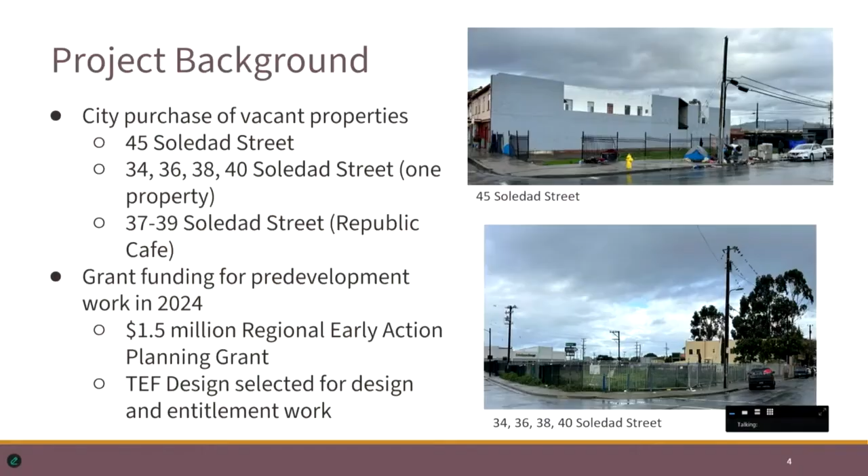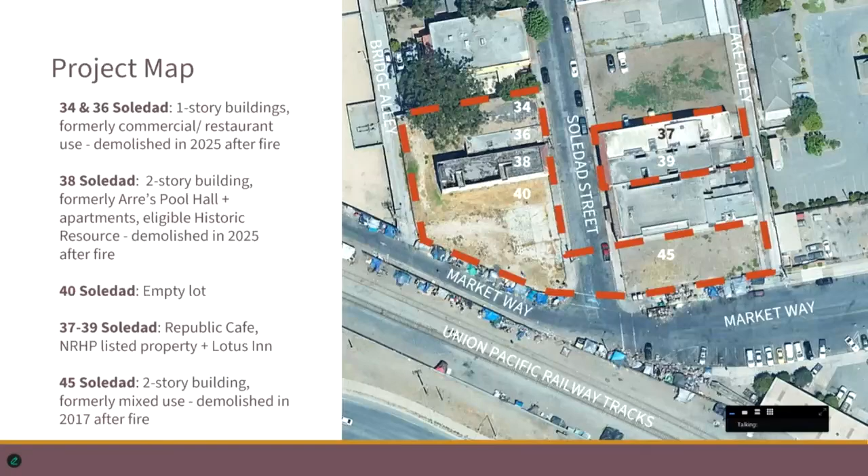So why did the city choose to undertake the pre-development work? It was a number of reasons. First and foremost, we've had trouble attracting private investment in Chinatown.

So by taking the first steps, acquiring the land, preparing any environmental studies, any remediation, preparing a set of plans and having those approved through the planning department, we're taking a lot of the risk off the private sector or the nonprofit developers and creating a site that is ready for financing and building permits. So a lot of the upfront work has been done.

The other thing is the community is very interested in the Chinatown Revitalization Plan and the redevelopment of these sites. So we wanted to make sure that they not only had a voice, but really a full seat at the table in this design work, so that we could honor the history of Chinatown, the rich architectural history there.

And then finally was to oversee the development of a really successful 100% mixed-use affordable housing site with various incomes from low to median to moderate income, mix of unit types, so you have a dynamic neighborhood, both studios, 2 bedrooms, 3 bedrooms for families, units specific for seniors, and then to have commercial space that's really viable.

Oftentimes with mixed-use development, the focus shifts to housing and the commercial side is maybe an afterthought or not fully fleshed out. We wanted to ensure that these sites were built so they'd be primed for success and future tenancy.

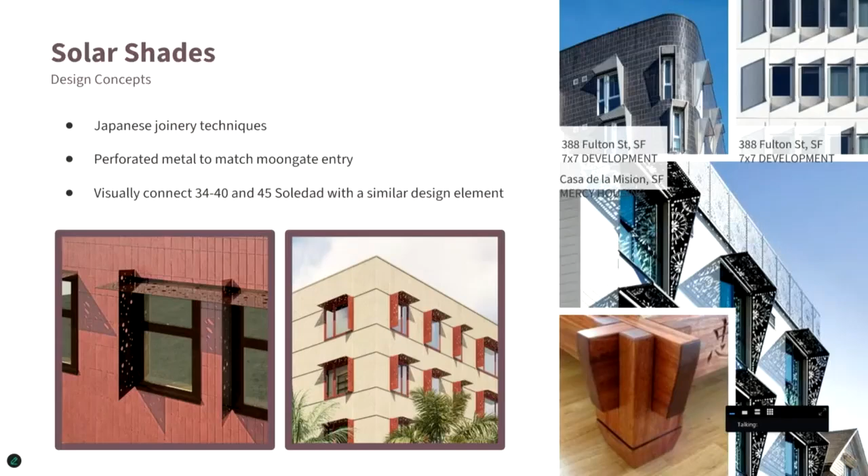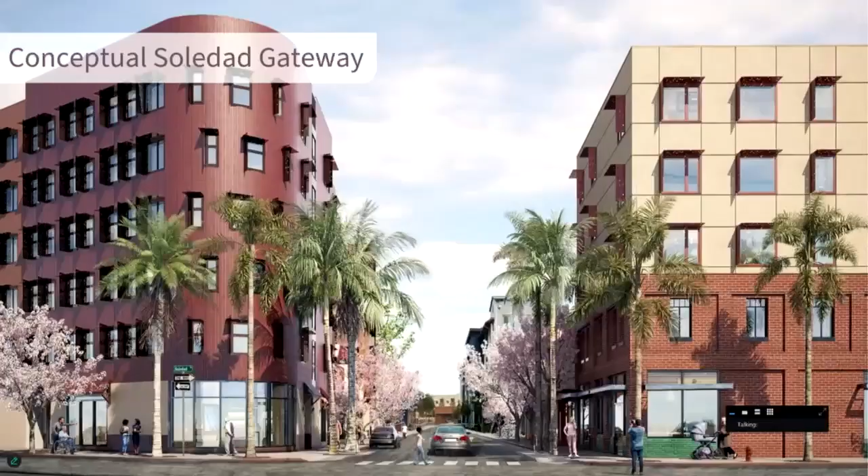So this is the initial conceptual view of the redevelopment of these sites. If you're looking down Soledad Street, you can see the current Chinatown Navigation Center at the end of the street, Moongate Apartments on the center right, and then the redevelopment of these two properties, 34-40 on the left and 45 on the right. Next slide.

And this is sort of a sidewalk perspective looking up towards the southwest. You can see a reconstructed 38 Soledad honoring the historic building that was lost to fire. Even the reconstruction of the original Arre's Pool Hall sign and railing - the railing was actually salvaged after the fire and could be updated and reinstalled to add authenticity. And then the carry through of many of those architectural features through the first floor of the building.

So tile awnings, tile at the sidewalk level, warm stucco colors through the first floor. But then avoiding a temptation to have a Chinatown Disneyland effect, as one of the community members said, where the whole building would be overly stylized. The floors 2 through 6 are then purposely done to be more of a modern architectural style. So at the pedestrian level, you're walking through and appreciating the history of Chinatown, but above, you're seeing its rebirth.

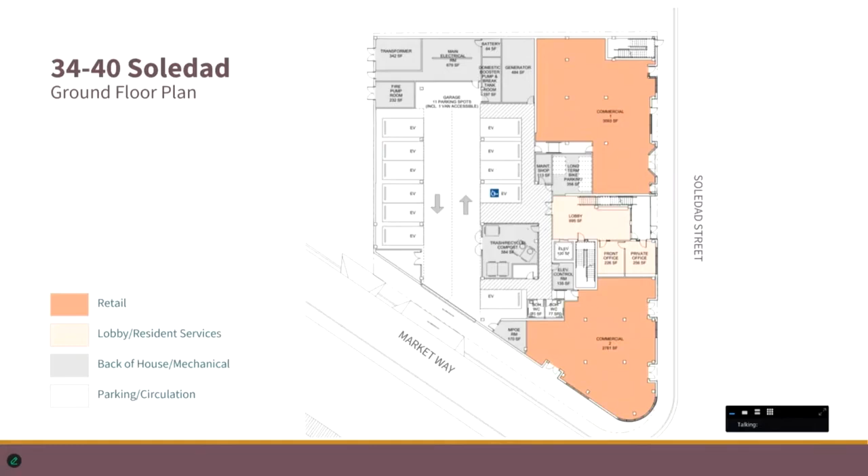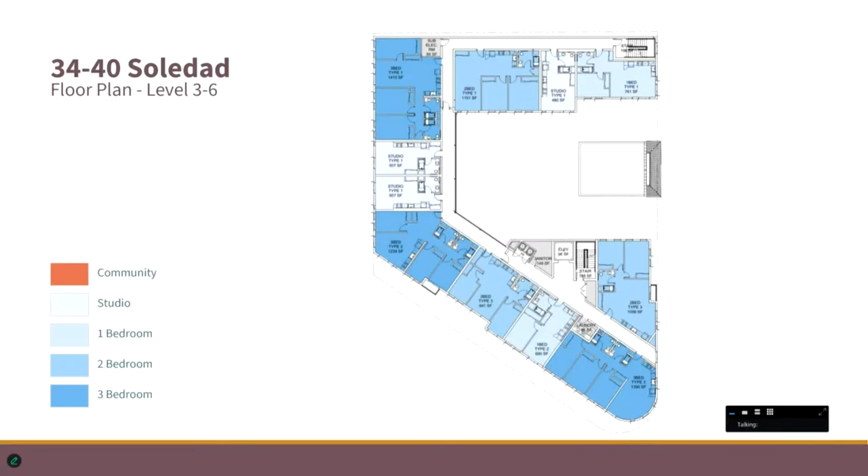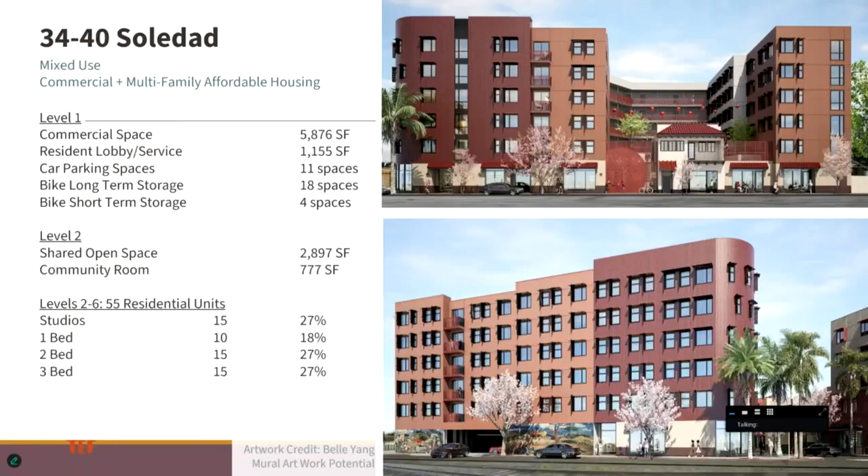So here's the rendering of it looking west from Soledad Street, the front of the building. You see the building enclosing the shared common area, the rebuilt historic structure, and then the various types of architectural features between the first floor and the second through sixth floor. And the view from Market Way with some opportunities for artwork, and then the entrance to the parking structure and utility rooms.

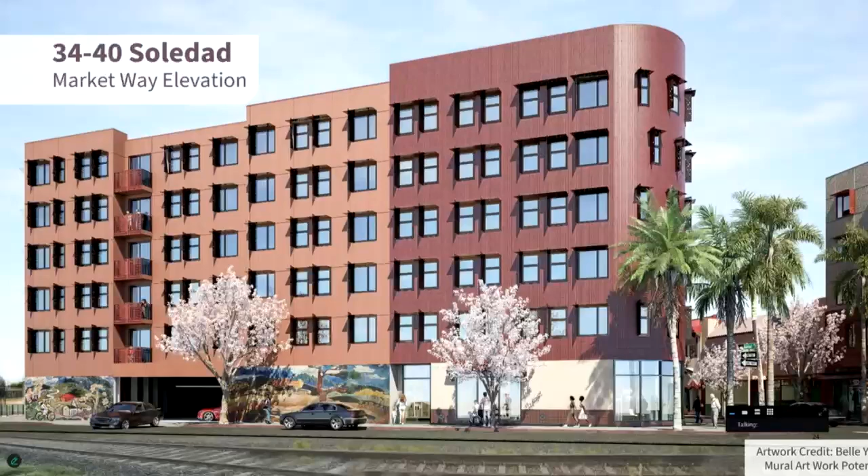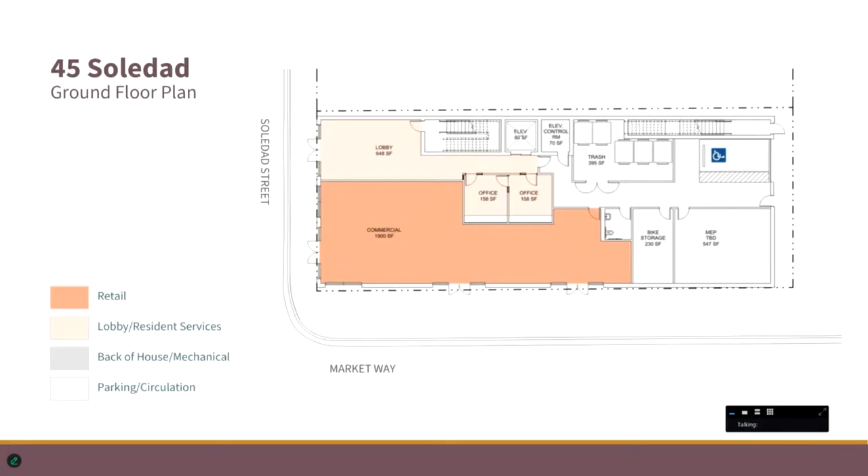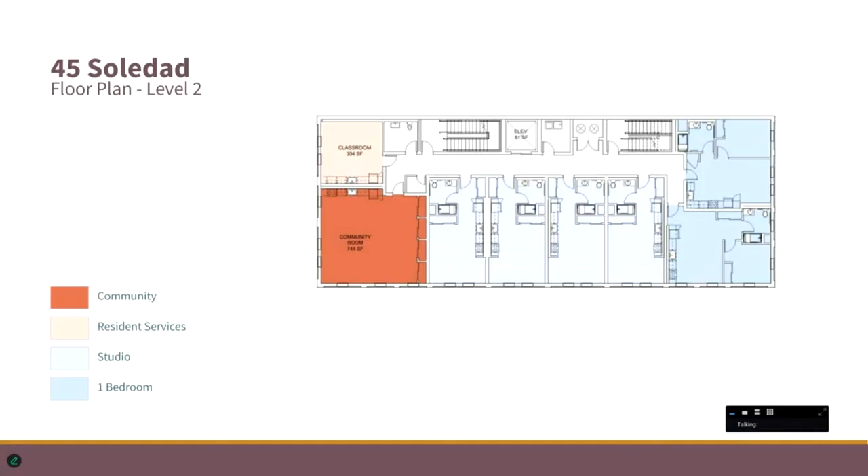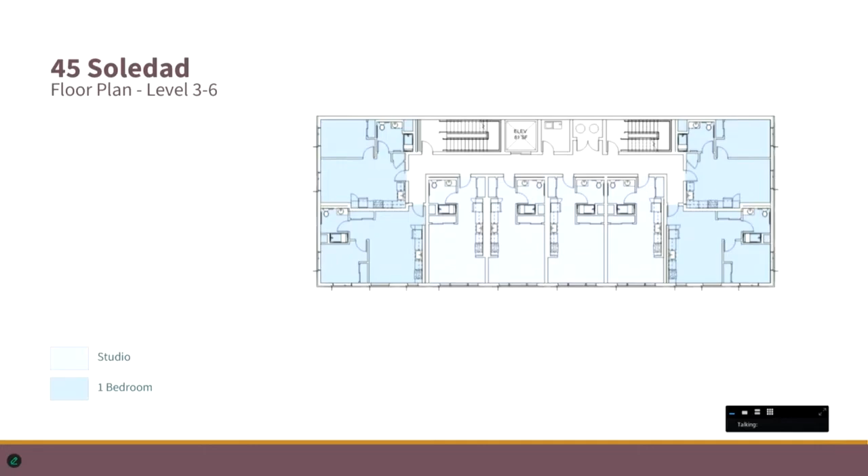Second floor would include the community room and classroom, and then a mix of studios and 1 bedrooms. And then floors 3 through 5, next slide, would be the stacked units for a mix of studios and 1 bedrooms. And for the summary slide, this was intended to be 100% affordable for seniors, so it's built to tax credit standards for seniors, whereas the 34 to 40 is built to tax credit standards for multifamily.

With a mix of commercial space, community space, and then an even split, more or less, between studios and 1 bedrooms.

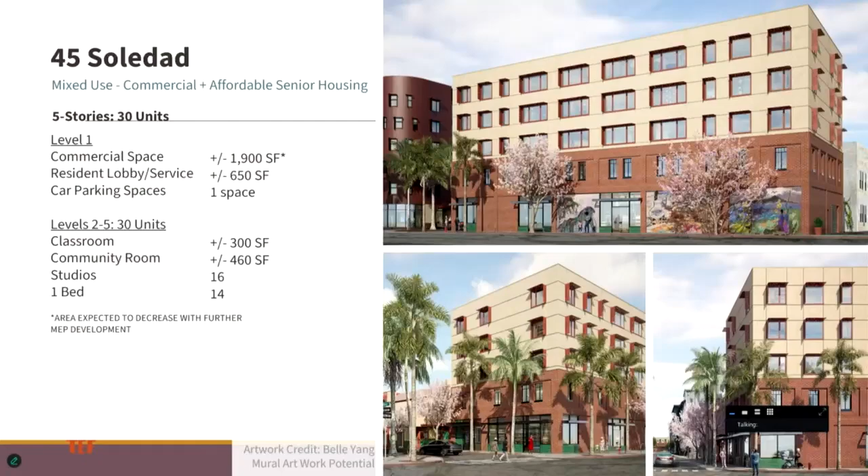Next slide. The perspective from Market Way looking northeast towards Fremont Peak. Towards the center of the screen is the Victory Outreach Mission and Republic Cafe, and then the new build between the historic rebuild and the first two floors, and then the new architecture above.

And then a different perspective from Market Way. The final project is the reconstruction and rehabilitation of Republic Cafe, 37 and 39. That is a photo from last fall, but it is an accurate representation of how the building looks today. Next slide.

So a bit about the historic nature of the building and why that's important. It is nationally listed on the National Register of Historic Places since 2011. That's because of its role in the community as a significant business, the association with important individuals from the community, the Ahtye family, and a distinctive example of the architecture at the time in the area.

39 Soledad Street, although connected and in every way looking as though the same building, is actually not registered yet, but we did the historic analysis for it, and it is eligible based on its heritage and the architecture of the building. This is important because it affects how you treat the building from a design perspective, and how much intensification you can do of the site versus how much you need to preserve. It also opens opportunity for different funding sources like historic tax credits or grant opportunities through historic foundations.

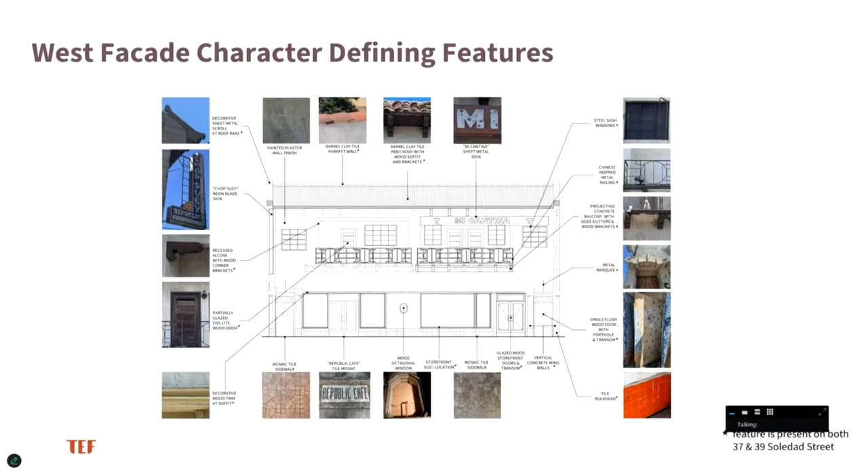Next slide. This is an example of what makes it defined historic, what character features it has: the roof line, the tile work, the signage, the unique tile at the ground level, the railing, the doors and windows. And although they're in poor condition now, they're all still there, so they could be preserved, rehabilitated, and brought back to its former glory. Next slide.

So there's two parts to this project. One is emergency stabilization, which is to save what's there and prevent any more decay: stabilizing the front of the building, repairing any fire damaged areas from a fire in 2022, and installing a fire suppression system so that we don't risk losing the building.

Minor stabilization from a seismic standpoint. Overall, the building's solid, but there's always work to be done in older buildings. And then making it watertight and totally sealed up so that no animals and no water can get into the building.

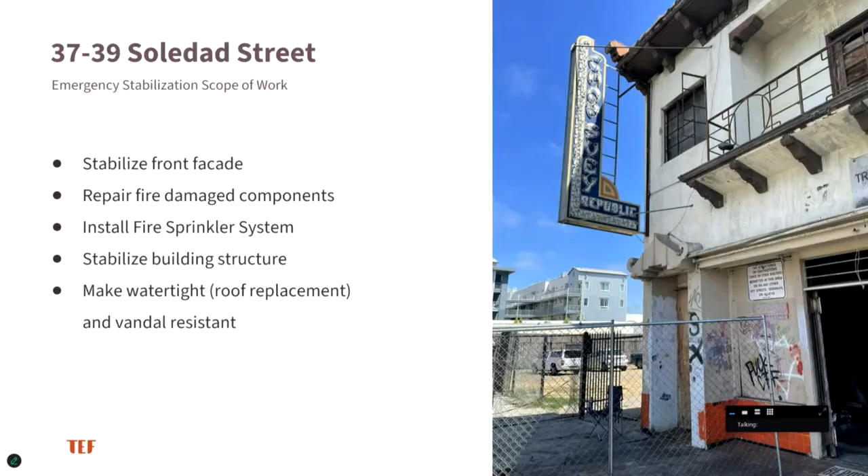Next slide. So that temporary stabilization will really focus on the areas outlined here. What could be saved and preserved would be, but it's likely that through this construction process, it's going to look like a different building temporarily as those areas are deconstructed and a temporary replacement is put in there. But it's with the aim of bringing it back.

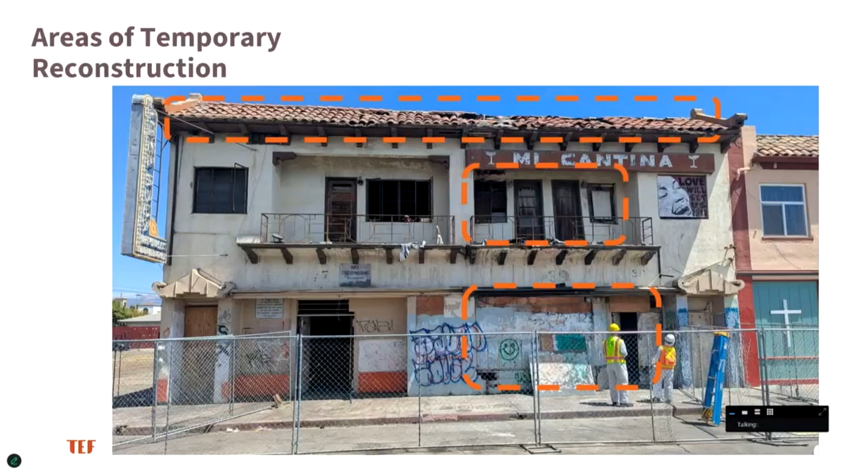For the interior, the city is in partnership with the Asian Cultural Experience of Salinas on this project. As a condition of buying the property, Salinas is going to work with them to create a cultural museum on some portion of 37 Soledad Street, the Republic Cafe. Highlighted in pink is the first floor, what could be museum space, meeting space, exhibit halls.

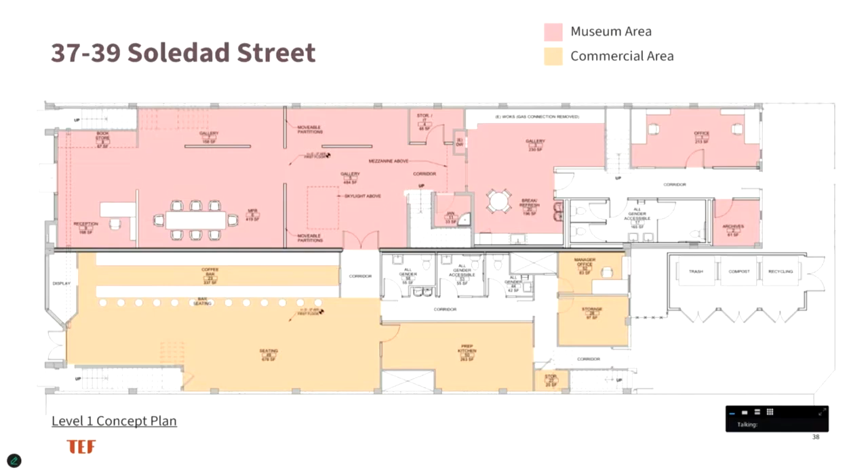And then down below in orange yellow would be the Lotus Inn first floor. It has a large existing bar and could be envisioned here to be continued as a commercial use, either a restaurant of some type or connected to the museum, like a museum cafe. There's a shared doorway between the two buildings featured in the middle of the screen, and then some utilities towards the back side of the building accessed off of the alleyway.

Next slide. And then there's an existing single-family apartment, which is historic in nature because it was used for the family that built the building, the Ahtye family. It's a 2-bedroom unit with a central kitchen and a living room facing Soledad Street towards the left of the screen. It's in fairly good condition, so the intent is to rehab it as is and use it as an affordable housing unit.

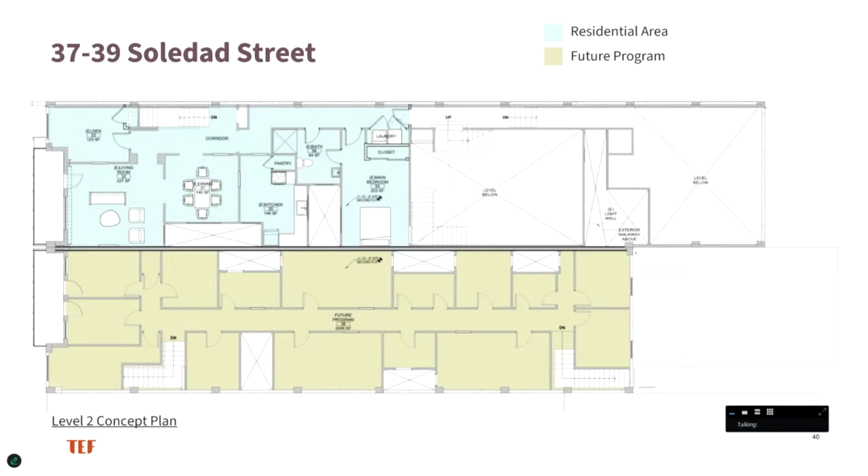And then down below on the bottom of the screen is the second floor of 39. It had been the Lotus Inn, which was a 14-room hotel or inn, lodge type of use. Here it's shown as unprogrammed; we don't have a tenant in mind yet, but it would have the same basic structure of a central hallway with some type of office use or rooms off to each side of the hallway.

And then there is a third floor, or a floor 2.5, in the Republic Cafe, which is a large open room conceived here to be archives or storage, and that has roof access as well.

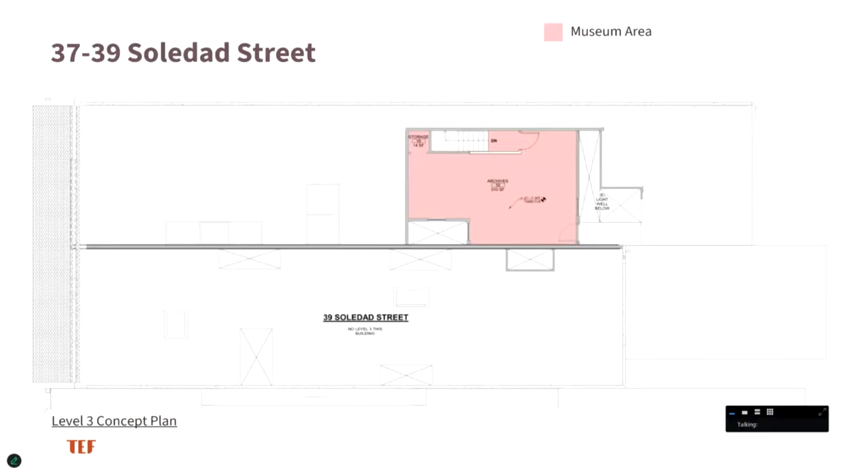So where we are today, it's February. We're in the middle, towards the end actually, of many of these initiatives, finalizing the site plans for 34 to 40 and 45, and developing construction documents for the stabilization and the rehabilitation of Republic Cafe.

Next slide. So the immediate next steps will be preparing to submit 45 Soledad Street for planning, review, and entitlement. We have submitted 34-40 for an initial review, and we're working through comments received by the city departments, and so that'll be resubmitted. And once those receive their planning approvals, a request for proposals will be developed, and that'll be released to affordable housing developers to come in and move forward with developing the sites.

And then 37-39 Soledad Street, currently envisioned to be a city-led project. So we own the building, we have the construction documents for the stabilization and the rehabilitation, and so the city could move forward with doing that, and then interior remodels or finishes might be done by the tenants at a later date. For instance, the ACES Museum would likely want to have their own finishes on the inside. So we'll do the bulk of the work, and then they can do the finishing work. Same for the unprogrammed space in 39.

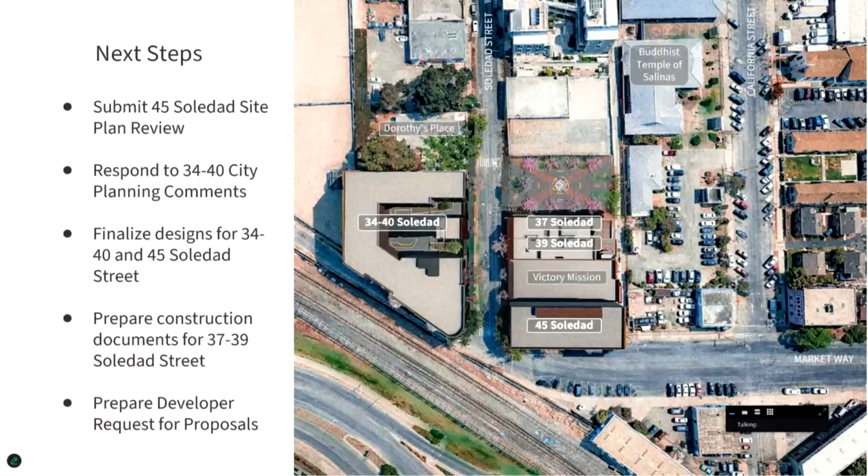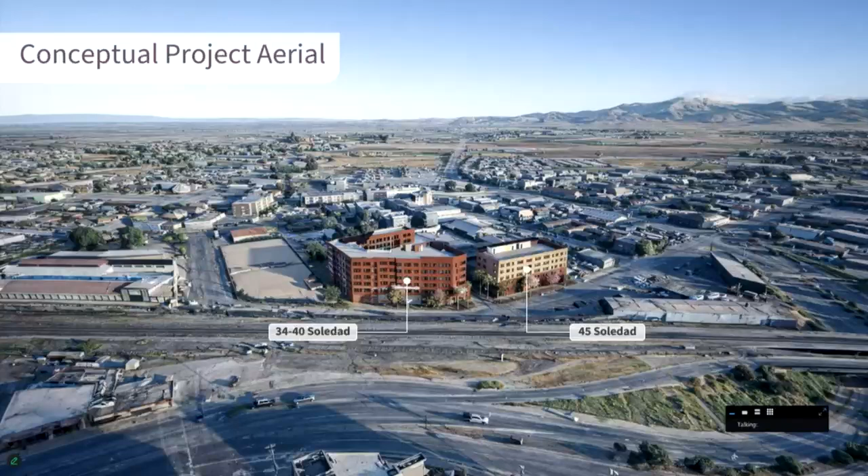Next slide. And then a final sort of inspirational view was looking from downtown towards the buildings northeast with Fremont Peak in the background. You can see how transformative this project would be for that neighborhood. And the look and the feel of the neighborhood would greatly change following its redevelopment, as is envisioned with the Chinatown Revitalization Plan.

So with that, happy to take any questions or comments. Awesome. Thank you, Mr. Leonard, for the presentation. I do have some questions.

Let me go back and through here. Sorry, finding my spot. What was it?

On slide 33, with the historic structures report findings on the comparison with the Republic Cafe and the Lotus Inn, what are the next steps to kind of get the Lotus Inn, which is eligible, hasn't yet been designated? Or what are the next steps? Is it until the city completes the whole permitting process that then it's eligible? Or can we go simultaneously through the process? Or is the city simultaneously currently pursuing that?

Right, so now that we have the study in hand showing it's eligible, the way it works in the city, per the city's ordinance for historic structures, is the owner of the building can move forward with designating it. In this case, it's the city. So it would be up to the city to decide the timing of pursuing designation for it.

And when we say whenever the city decides, who exactly is this? Who are we referring to? Is that like the city council? Correct, yeah, formal direction from the city council. Okay, thank you for that.